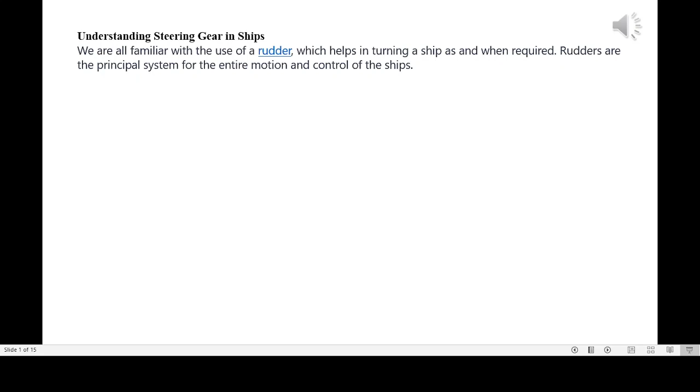Understanding steering gear in ships. We are all familiar with the use of a rudder, which helps in turning a ship as and when required. Rudders are the principal system for the entire motion and control of the ships.

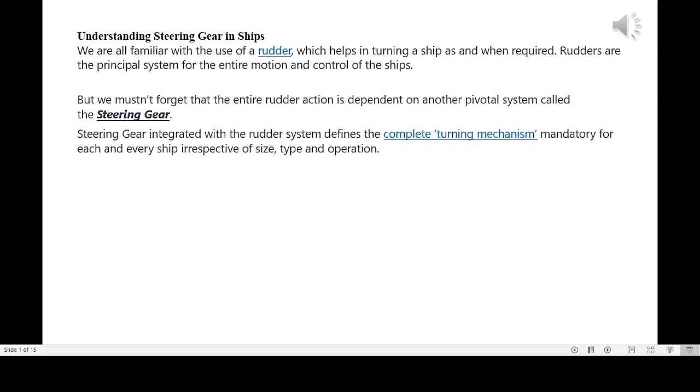But we mustn't forget that the entire rudder action is dependent on another pivotal system called the steering gear. Steering gear integrated with the rudder system defines the complete turning mechanism mandatory for each and every ship, irrespective of size, type, and operation. The steering gear system has been an indispensable part of the ship's machinery since the advent of the very early ships, which were operated by hand.

Here we have a simple hull, and I'm just going to attach a normal rudder to the stern. If we keep the rudder amidships, we can watch how the water flows around the hull-rudder combination. It flows evenly, and this means there's no turning force generated, so the hull should move in a straight line.

If we now turn the rudder to port, we can see the effect it has on the flow of water. This board-type rudder has now directed the water in a different direction, at an angle away from the boat. The extra water increases the pressure exerted on this side, and decreases the pressure on this side. This pressure difference pushes the stern in this direction, inducing the desired turn to port.

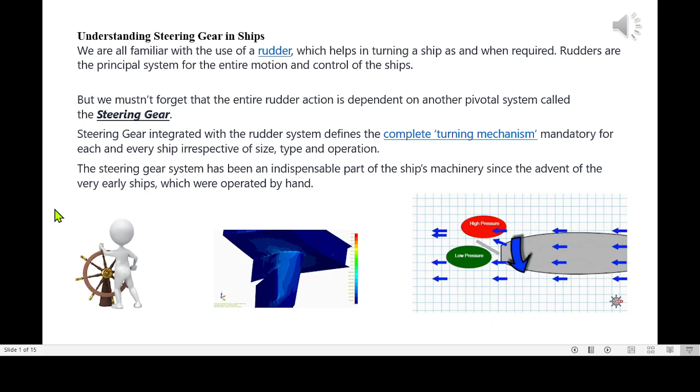Steering gear is equipment provided on ships to change the direction of the ship during sailing or maneuvering. The steering gear works only when the ship is in motion and does not work when the ship is stationary.

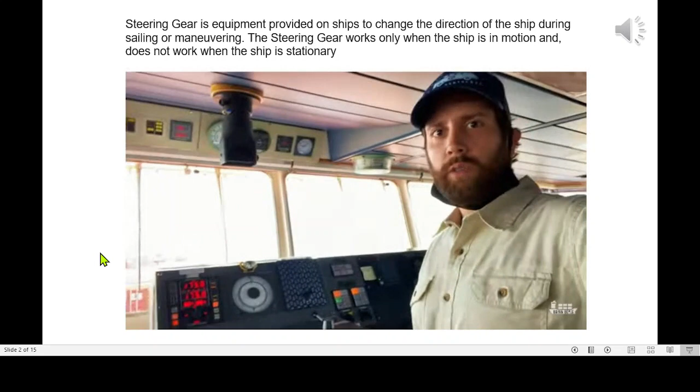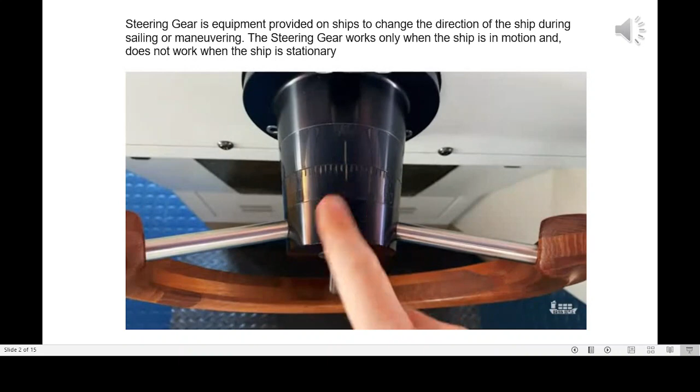We're up on the navigation bridge, and I'm standing in front of the helm here, which is where we steer the ship. So this is the helm here. It has this faint line here where you can give rudder commands. So right now this is midship. If we turn it over, that would be starboard 10. That would be port 10.

The reason it's beeping at us right now is because we're on autopilot, so it's beeping at you to tell you, hey, you need to switch over to hand steering. Otherwise, I'm not going to do anything.

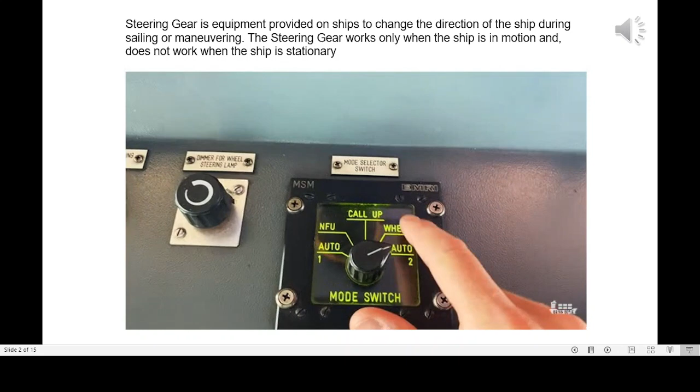So here's the different modes here. We've got autopilot 1, autopilot 2, which is what we're currently using, wheel or hand steering, call up, and NFU, which is non-follow-up. So here's autopilot 2. This is the heading that we have set for it to steer. This is what the actual heading is, the gyro heading. So we're steering right now 300.0.

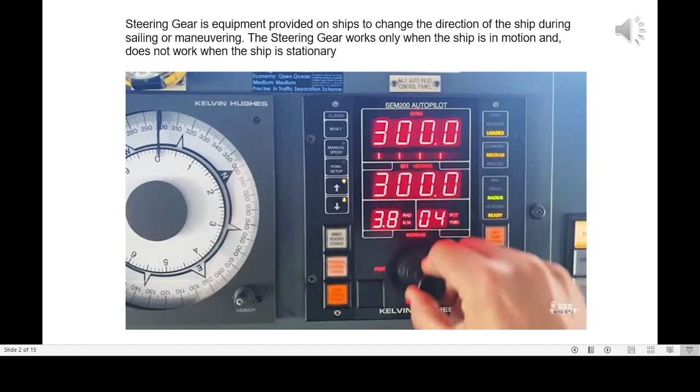A couple other modes we have. The radius - this correlates to the rate of turn. So if we have a smaller radius in the turning circle, you can see the rate of turn increases. If we're going fast enough, you don't want to have a high rate of turn, otherwise the ship will heel over and move a little bit too aggressively in the turn. So try to keep it around like 5 degrees is pretty good.

Here's autopilot 1, which we cover up just to make sure you're not trying to hit the wrong switch here. You see here it'll beep at you as well, unless we switch it over to autopilot 1. We have 2 autopilots just for redundancy in case one fails, and every day we switch the autopilot units just to keep the number of hours on them as even as possible.

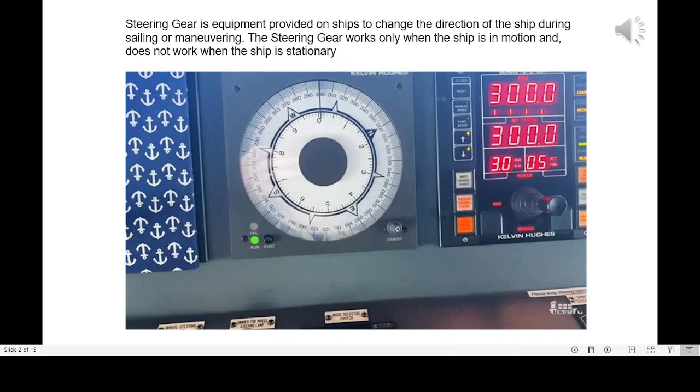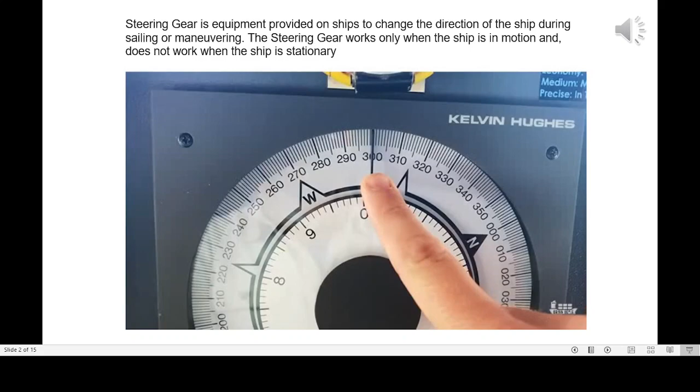This right here is a gyro compass. It's an analog version of this reading right here. So we're steering 300.0. This is the non-follow-up tiller.

When you move this, it'll move the rudder until you let go, and then it'll stay at whatever you left it at. I'll show you an example of how that works here in a moment.

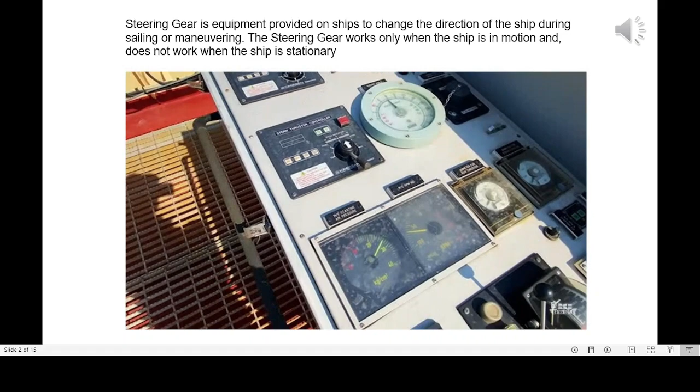So when we're in call up mode, it allows the ship to steer using this right here. We can also send the throttle over here in call up mode. We can send the stern thruster and the bow thruster out here as well. And this console looks identical on the starboard side.

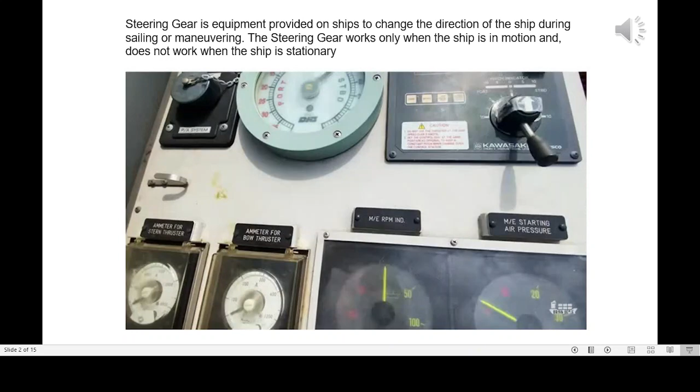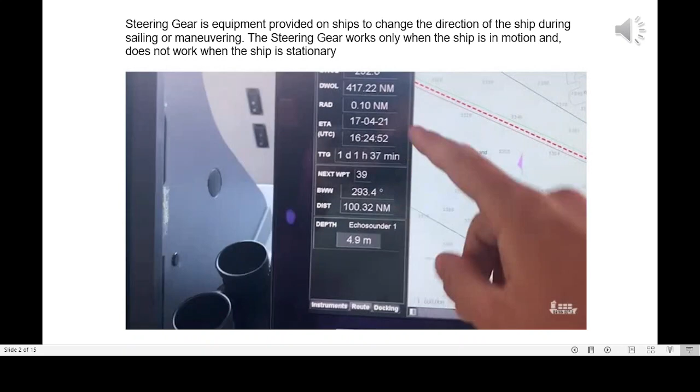Okay, so we're going to steer back to our next waypoint, which is 293. And we'll do that in hand steering to demonstrate how we do steering by hand and with non-follow-up. All right, so let's go to hand steering.

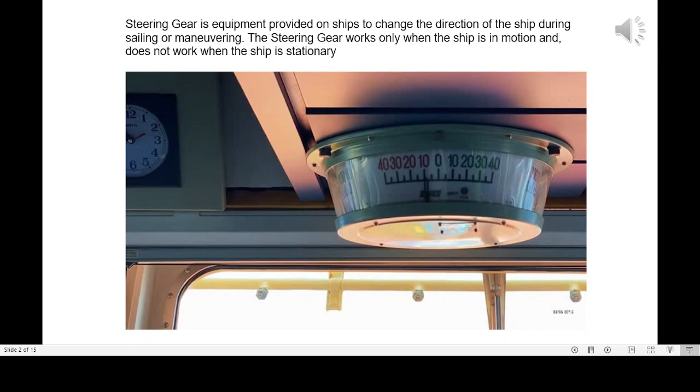He's on 300, so we'll go to 293. So he's turning the wheel to port 10 there. Our rudder angle indicator shows what he's doing there. We also get some other information that's useful, like rate of turn, so he's turning at a rate of about 8 degrees a minute to port.

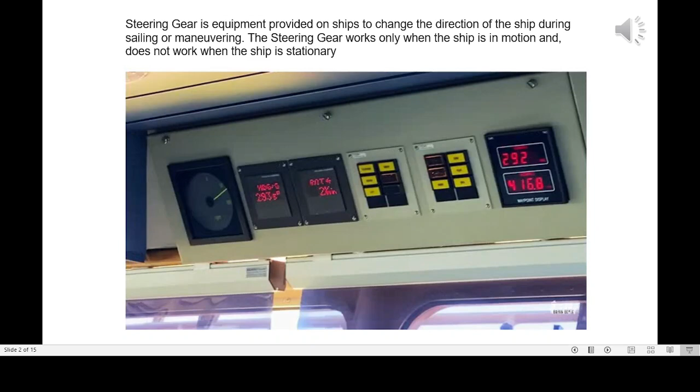When he gets closer to 293, he's going to have to apply counter rudder to slow the swing of the ship. So there's the counter rudder. The rate of turn is slowly decreasing to about 0 degrees there. So now he's steady on just about 293.

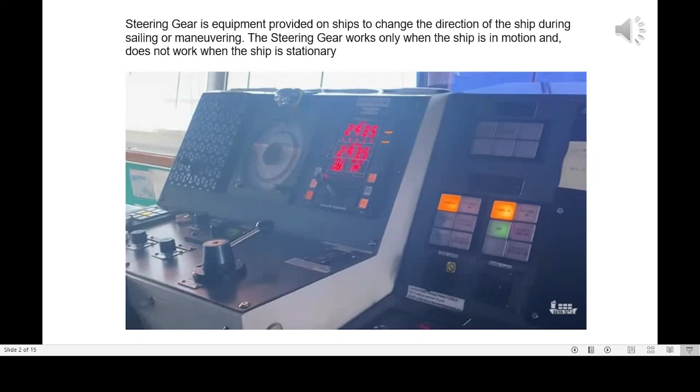All right, now we're going to show non-follow-up. So let's switch to NFU. NFU, rudders amidships, NFU. So he's going to move that tiller, left 10. He's got to hold that tiller and then release it once he gets it on the angle he wants. Let's go right 10.

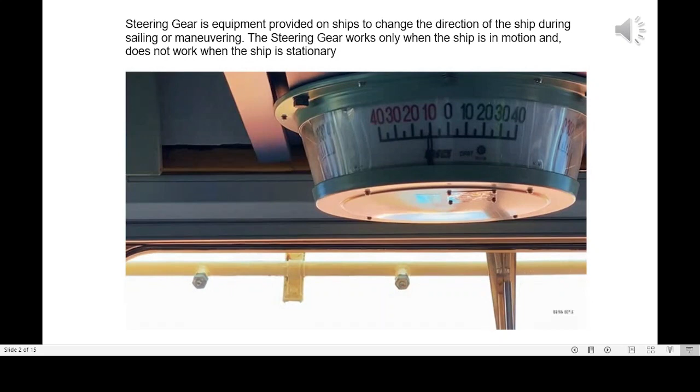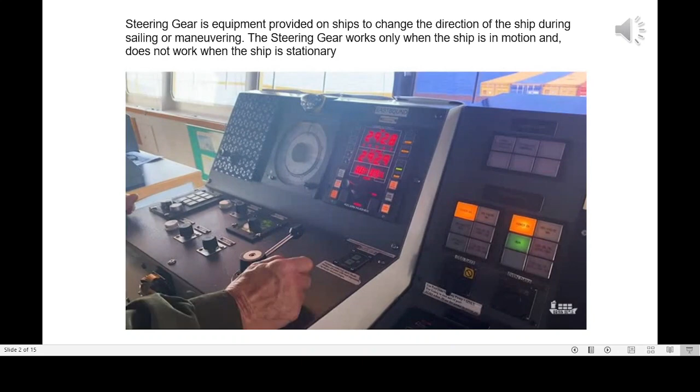There are 2 steering gears. We have number 1 steering gear and number 2 steering gear. These alternate every day. Even days we try to run the number 2 pump, and odd days we run the number 1 pump. So you can see today's the 16th, that's an even day, so we have the number 2 pump running.

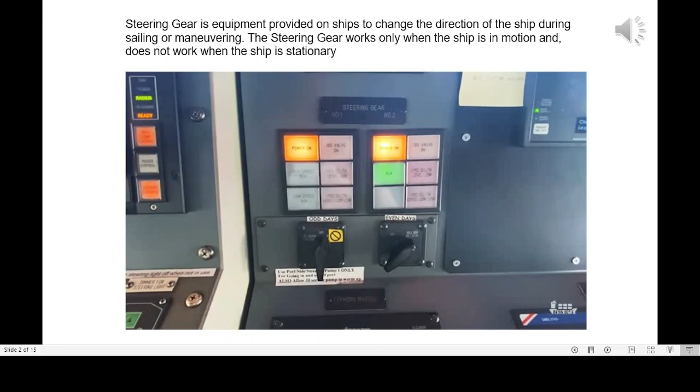Whenever we're coming in and out of port, we always have the number 1 pump on though, because that's attached to the emergency bus. So if we lost power, the emergency diesel generator would turn on and would still give us power to our steering. These steering pumps are hydraulic pumps that move a steering rack connected to the rudder. We'll go back to the steering gear and look at these 2 pumps and the steering gear system itself.

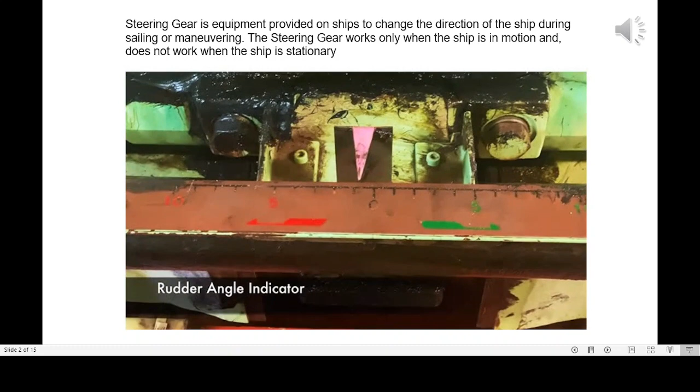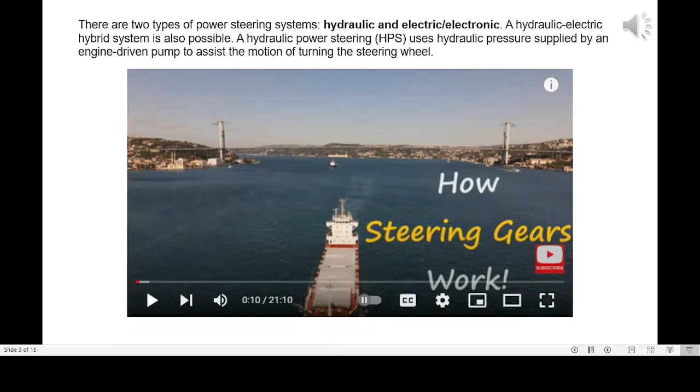In order to be able to achieve this, the item we're going to be focusing on in this video is called a steering gear. In order to understand how the steering gear works, we're going to need to briefly discuss the topic of hydraulics and take a look at some of the steering gear's main components.

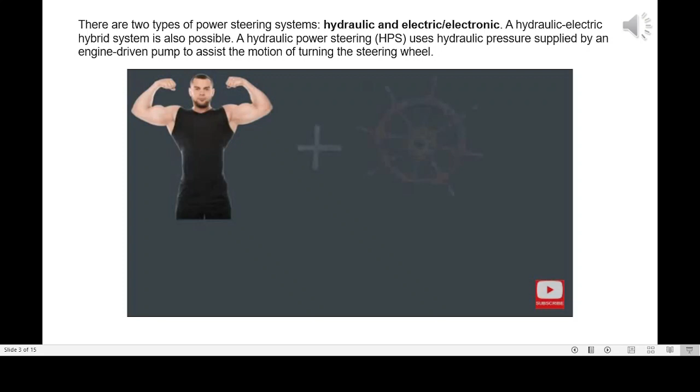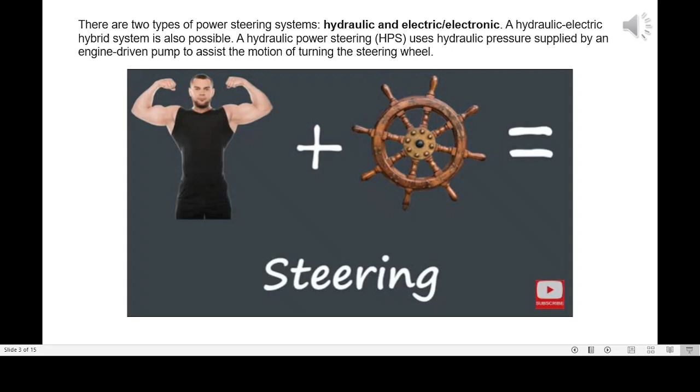Now in the past, when you wanted to steer a ship, you could do it mechanically. You would find a muscly sailor, stand him next to a big wheel, referred to as the helm, and he would turn the helm to port or starboard in order to change the direction of the vessel. The helm was connected via pulleys and levers to the rudder, and that's what actually caused the vessel to change direction. Fast forward several hundred years, and ships are now so large that it's not possible for a single person, or even many people, to manually adjust the position of the rudder using pulleys or levers, etc.

So how do we adjust the position of a rudder, accounting for the fact that the rudder may weigh several tons? Well, in engineering, there are 4 main ways used in order to actuate something. When we're talking about actuation, we're referring to movement.

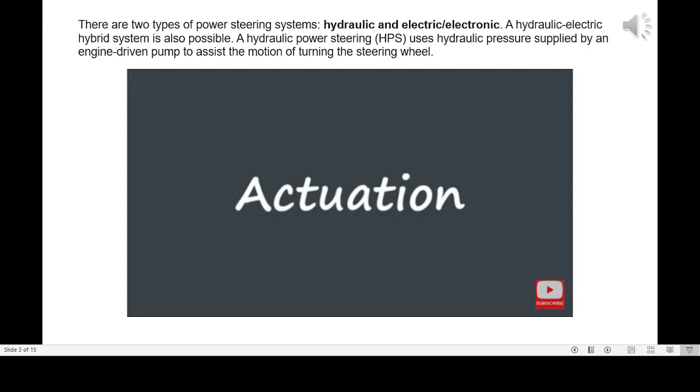If we want to actuate a valve, move it from the open to closed position, or any position in between, then we might do this mechanically, perhaps by using a hand lever or a hand wheel. We may do it pneumatically, using compressed air. We may do it hydraulically, often using some sort of oil, or electrically, using some sort of electromagnet or electric motor. Modern steering gears are predominantly electro-hydraulic.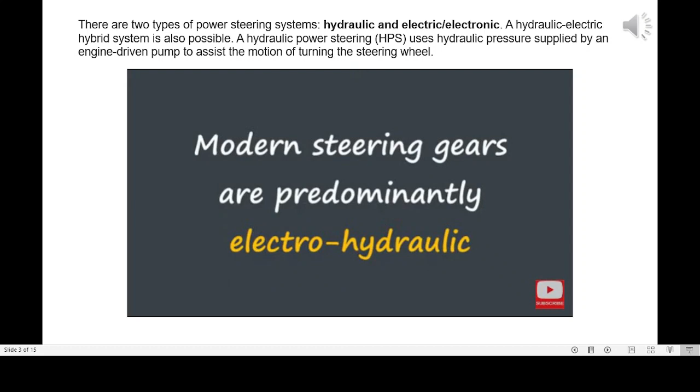They use an electric motor attached to a positive displacement pump, which pumps hydraulic fluid within a hydraulic system. So let's take a look at that in action.

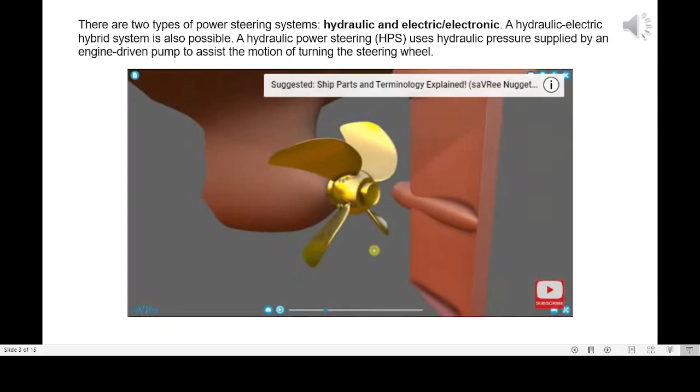Here we have our steering gear. Beneath the steering gear we have a rudder, and further forward we have a propeller. If I press the play button, we can see the propeller turning. If I zoom out a bit, we can actually see the rudder changing position. The rudder now is coming to port. The rudder now is coming to starboard.

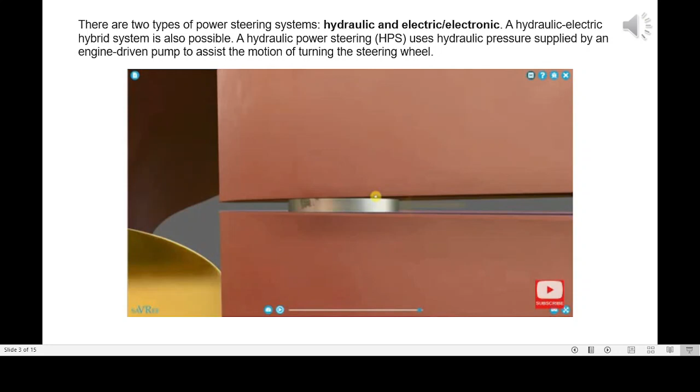The rudder is attached to the steering gear via a rudder stock. You can actually see it here. The rudder stock runs up through the rudder, through the hull of the vessel, and connects to our steering gear, which is this green item here.

Connecting to the rudder stock is a tiller. This type of tiller is a forked type tiller because it has a fork shape. Between the forked tiller is a pin and a codpiece. Don't ask me why it's called a codpiece, it just is. The pin connects onto a ram.

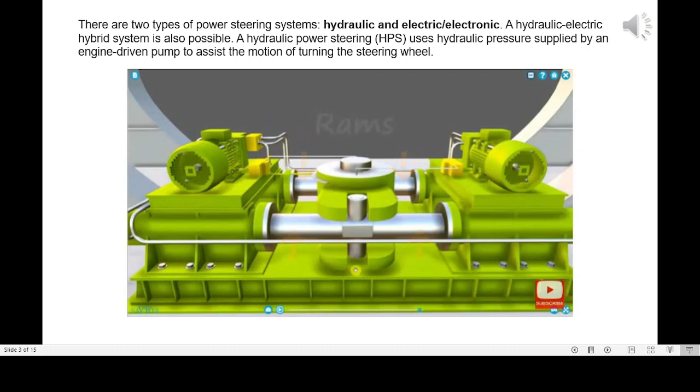You can see that there's a ram on the opposite side here, and it's these rams that are used to move the rudder. The rams move in a linear direction, either moving to port, which is towards the left side of the screen, or starboard, which is towards the right side of the screen. Although the rams move linearly, the rudder stock moves in a rotary direction, and it's the tiller that converts this linear motion from the rams to rotary motion at the rudder stock. You can also see the keyhole where the rudder stock attaches to the tiller.

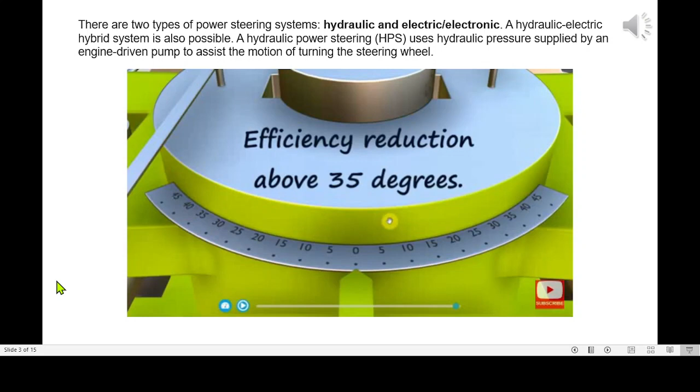Over on this side we can see a rudder angle indicator. The rudder angle indicator here goes from 0 to 45 degrees on both sides, but typically the rudder will only move between -35 to 35 degrees maximum. Once you get past 35 degrees, the rudder is no longer so effective, and it's definitely not as efficient because you get small eddy currents or eddies which create turbulence and reduce the efficiency of the rudder and the turning effect it creates. It's a requirement that the steering gear should have some form of local rudder angle indicator.

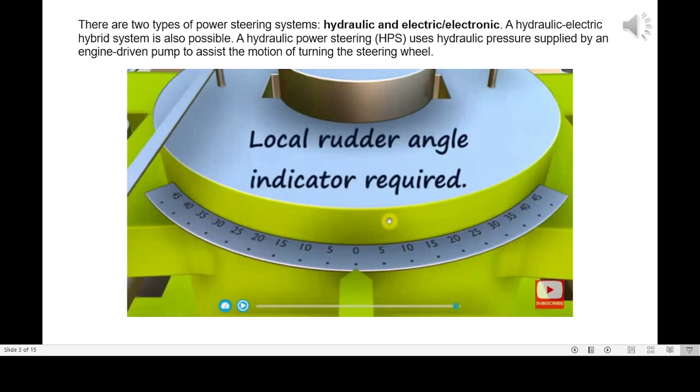So fixing this plate onto the tiller is a pretty good way to fulfill this requirement. Attached to the top you'll see we've actually got two bars, these two thin connections. These connect usually to a control box and some sort of position indicating transmitter. And we can transmit this signal back up to the bridge so that they can see the position that the rudder is currently in. So a local rudder angle indication is provided here, and a remote rudder angle indication is provided via a transmitter, which transmits a signal that is received in the wheelhouse, also known as the bridge.

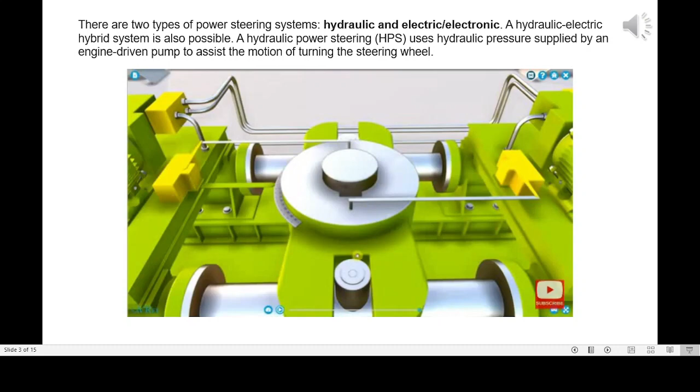Aside from that, on both sides of the steering gear we have an electric motor, one here and one on this side, and we have some directional control valves. Here is the one, and go around to this side, here is another.

Encasing the rams are cylinders. There are actually 4 cylinders on this type of steering gear. This is known as a 4-ram type steering gear. It's also possible to get 2-ram type steering gears. Those are the 2-ram type steering gear designs that you're likely to encounter, the 2-ram and 4-ram. And the other type of steering gear design that you may encounter is the rotary vane type steering gear, which we can cover in another video.

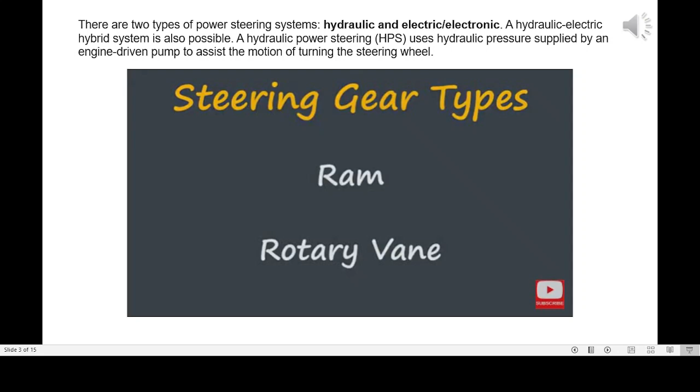So let's have a look at the steering gear in operation. You can see that the rams are sliding linearly from the left side of the screen to the right, or the right to the left, depending upon which rams you're looking at. So these rams here are moving off to port, and now they're moving off to starboard.

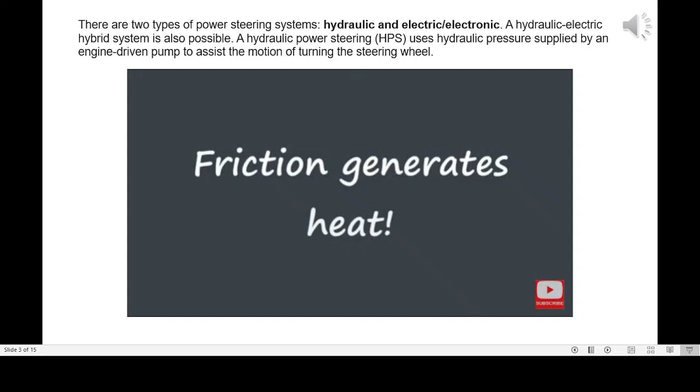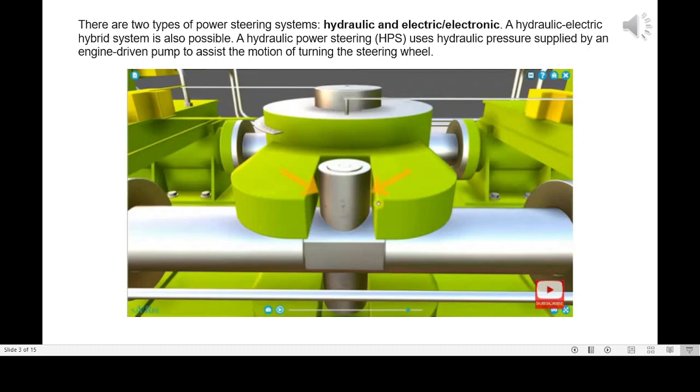Around this piece here, where we connect to the tiller, will usually be a lot of grease. We have a lot of grease because we don't want a lot of friction between these pieces, because friction generates heat. It's not so much that the pieces are moving very fast, because they're not. It's just that the sheer weight of each of these items and the effect of metal pressing against metal will cause some heat, some rubbing, some friction, some abrasion of these parts if we don't lubricate them. And that's the reason we usually add a lot of grease around this area and around this area here.

If we take a look again at the steering gear, this time from the top, we can really see how these rams work together in order to move the tiller and the rudder stock. You can actually see the linkages as well that connect to the control box and the transmitter, and how these move as the rams move back and forth.

So we know we've got a pump, we know we've got directional control valves, we've got rams, we've got cylinders, there'll be some valves on there as well, relief valves, a hydraulic oil storage tank, or in this case actually 2 tanks. But how are we moving the rams, and how are we correspondingly moving the rudder?

We take a look from this angle, you can see the steering gear moving off to port, or the rudder moving off to port, and now it begins to move off to starboard.

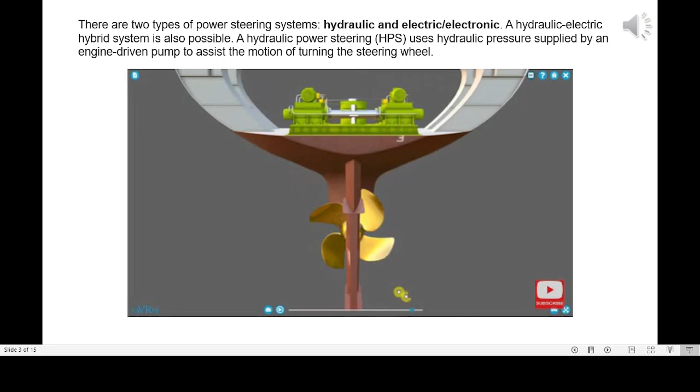We're moving the rudder using hydraulic fluid. Let's have a look now at a hydraulic system, and that will help us understand exactly how the rudder is being moved. So here we have a diagram of the hydraulic oil system used to control our steering gear.

Now this is a very simple diagram. A typical 4-ram steering gear system will have relief valves, isolation valves, check valves, also known as non-return valves, and generally the system is much more complicated. That being said, the principle concerning just how this steering gear works is very simple.

We use a hydraulic system to move the rudder because with the hydraulic system we can actually be quite flexible concerning just how we actuate the rudder. Let me just show you what I mean.

On the left side of the screen here we've got a motor, we've got a pump, and I won't go through all the parts, but we've got here a directional control valve and a tank. That's where we'll store our hydraulic fluid. Typically, hydraulic fluids are oil-based, but you can also use a glycol-water mixture if you have a very large hydraulic system.

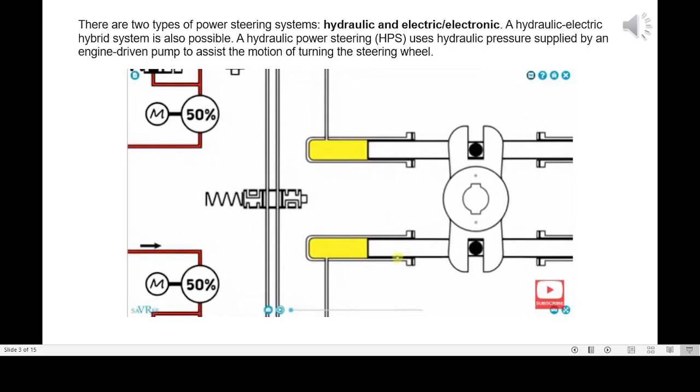Now we have another directional control valve here, which we're not actually going to actuate in this simulation. Then we've got our steering gear, which actually is this entire diagram. But you can see we've got 4 rams, 4 cylinders, the tiller, and the rudder stock.

Over on this side, the top left, we've got the same setup again. The reason we have the same setup is because in shipping, whenever you have something that's critical to the ship or to the vessel, you double up on it. In other words, you have what's called N+1, some people say N-1, which means you have 100% redundancy.

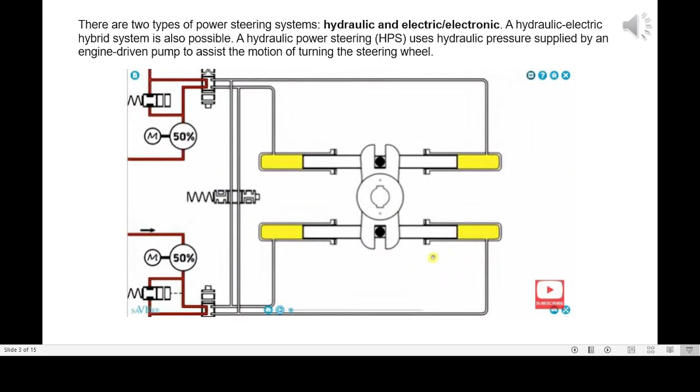So if we have an oil leak on any part of the system, let's just imagine for a moment that this particular pipe here, which contains hydraulic fluid, would burst. Then we can isolate this entire system here, that is to say the tank, the pump, the motor, up to the directional control valve, and then we can use the other pump, motor, and tank and directional control valve in order to actuate our rudder. So that's why you double up or install redundancy whenever you have a critical system.

And they do this also in power stations as well, and pretty much any other type of industrial plant where you have a critical system. A good example might be cooling pumps in a nuclear power station.

But let's stay focused on steering gears for a moment. In this example, what we want to do is distribute hydraulic oil to these cylinders, and this hydraulic oil is then going to force the rams to move in a certain direction. Let's have a look at exactly how that will occur.

I'll press the play button. Now keep your eye on these directional control valves. Notice now that the valves moved, and these red lines that have suddenly appeared represent hydraulic oil.

You can see that the oil is being delivered to the cylinders. As the oil is pumped into these cylinders, the rams are going to move away from where the oil is arriving into the cylinders, and they're going to force oil out at the opposite ends.

Let's just back that up again. So our hydraulic oil is pumped into the cylinders, top left and lower right. Usually these cylinders will be called A, B, C, D, or 1, 2, 3, 4, and the rams begin to move. As they move, hydraulic oil is discharged from the opposite ends.

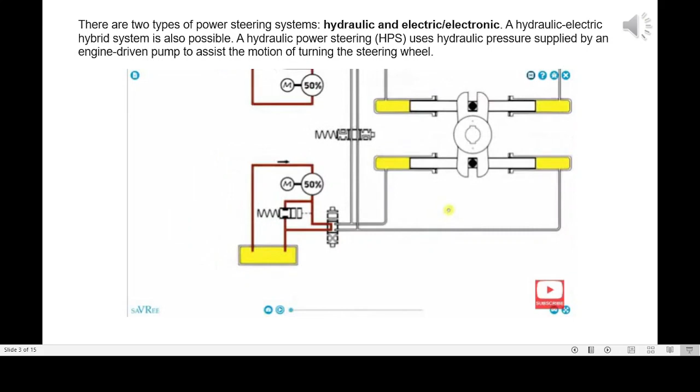What's important to realize here is that hydraulic oil actually occupies all of these lines, all of these channels, all of these pipes here, as well as the spaces within the cylinders, and we'll also have hydraulic oil in the tanks. So although in our diagram we're showing hydraulic oil being pumped around the system, the whole system is already charged with hydraulic oil.

If there's any air in the system it begins to act quite erratically, and for that reason we bleed off air within the system. Bleeding just means venting off the air. There will be air cocks or air purges, which are normally just some type of ball valve for this reason.

When the system is in the condition shown here, we're actually just recirculating the fluid from the suction side of the pump to the discharge side. You can see that the fluid would come up here, go to the right, go to the pump, that's the suction side, and then it would be discharged here, pass through the directional control valve, and go back to the tank. Now there are different designs concerning how the fluid is delivered back to the pump, whether directly or via a tank, but the operating principle is simply that we are recirculating hydraulic oil.

So we're not discharging any hydraulic oil to our cylinders, which means the rams are not being actuated, they're not moving. So if we go back to our animation, I'll press the play button again. We're recirculating the hydraulic oil at the moment.

The directional control valves have changed position again. We're discharging hydraulic oil, this time to the upper right cylinder and to the lower left. You can see the arrows there. And that means that as the rams move, they're going to discharge oil from the upper left and the lower right cylinders. You can see that occurring here.

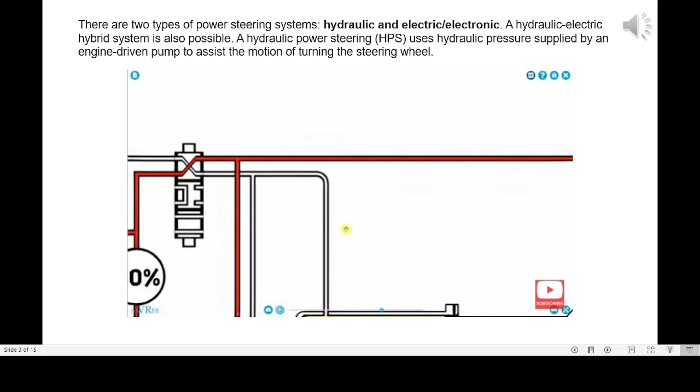And if we change the position of our directional control valves again, as you can see over here, then we are changing the flow paths within the system, which means the opposite effect is occurring compared to what we just saw. Hydraulic oil is entering the cylinder in the top right and the lower left, and is being discharged from the cylinders in the top left and lower right.

This diagram is very, very basic. We are not showing the servo pump. We're not showing the relief valves. We're not showing the check valves. But in order to understand exactly how our steering gear works, you don't need all of that stuff at this time. What we're trying to understand is simply that we can use hydraulic fluid to change the position of the rudder.

By using a directional control valve, like this one here, we can change the flow path of the hydraulic oil within the system, which in turn allows us to change the direction in which we move the rudder, whether it be from port to starboard or starboard to port.

Let's just have a look at that again briefly, because it's a very important part of just how a steering gear works. So here you can see we're recirculating our hydraulic oil. Here you can see that we're crossing over our systems because we want to send hydraulic oil along these paths, and that's where we're discharging hydraulic oil.

You can see our hydraulic oil is coming back to the pump. That's represented by the green line, and we can see our hydraulic oil is being discharged from the pump. That's represented by these red lines.

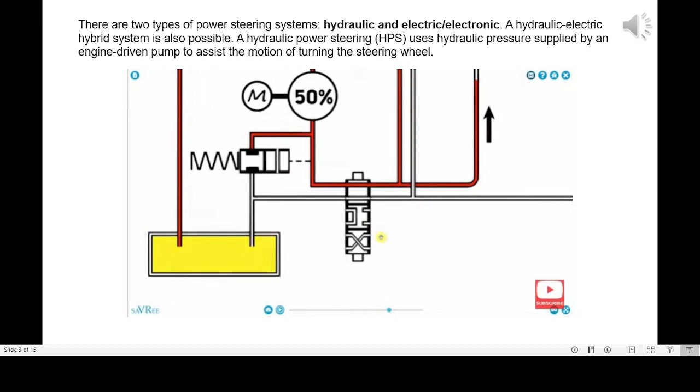Let's back it up. Here you go, the green lines, fluid returning, going to the tank. Change the position, those green lines become red. So these directional control valves are very, very important because those are what allow us to reverse the direction that we're moving the rudder in.

What's also interesting is that we have these two separate systems, two pumps, two motors, two directional control valves, there would also be two relief valves, etc. And if we were to isolate these two systems, we can do that using this valve here, then we can have two separate systems operating completely independently of one another. That again is a safety feature associated with the steering gear.

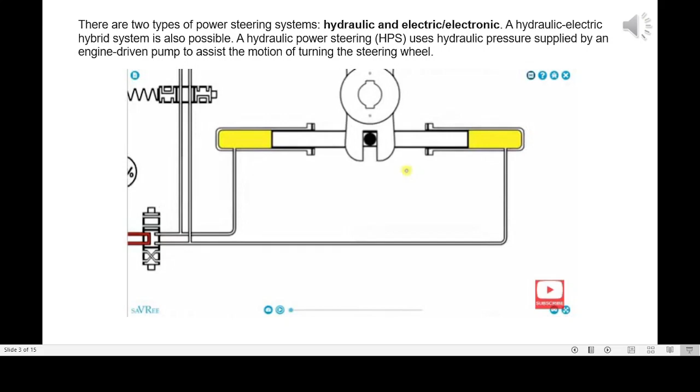So if we look at the top system, imagine we have an oil leak, imagine the pump fails, imagine the motor fails, imagine that the hydraulic oil tank has a leak. If any of that occurs, then we can completely isolate the top system and use the bottom system instead. Depending upon where the failures occurred, we could potentially use one pump here to operate all of the rams, or we completely isolate the top two rams and the top two cylinders, and actuate the rudder using only the bottom two rams and the bottom two cylinders. So completely independent systems, full redundancy, and that's what makes the system so safe.

Let's now go back to our original 3D model of the steering gear so that we can have a look at how this whole system works in the real world and how you're actually going to see it if you're on board a ship.

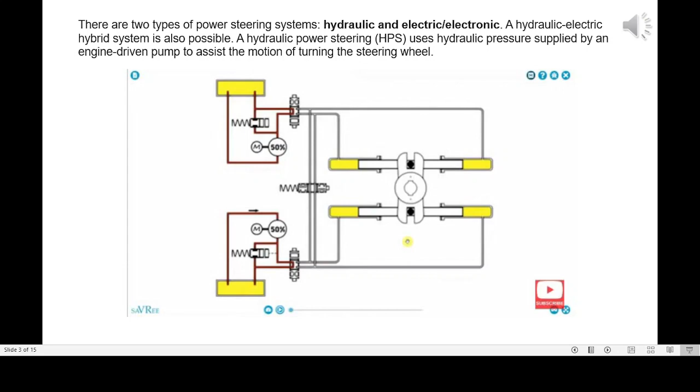Steering gear system in ship. The efficiency of the performance of steering gear depends on some main aspects.

These basic requirements to be invariably met by all steering gears are guided by rules set by classification societies. They can be briefly outlined as per standard requirements: the steering gear should be capable of steering the ship from 35 degrees port to 35 degrees starboard and vice versa, with the vessel plying forwards at a steady head-on speed for maximum continuous rated shaft RPM, and summer load waterline, within a time frame of a maximum of 28 seconds.

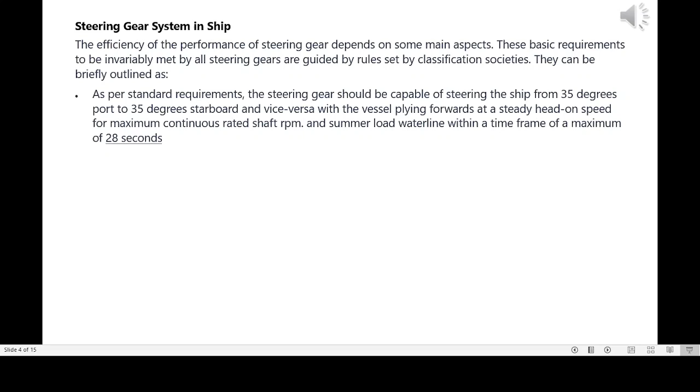With one of the power units inoperative, the rudder shall be capable of turning 15 degrees port to 15 degrees starboard and vice versa within a time frame of 1 minute, with the vessel moving at half its rated maximum speed or 7 knots, whichever is greater, at summer load line.

The major power units and the control systems are to be duplicated so that if one of them fails, the other can easily substitute for it as standby.

Emergency power supply: the steering gear system is to be provided with an additional power unit, hydraulic pump, etc., connected to the emergency power supply from the emergency generator, which shall be capable of turning the rudder from 15 degrees from one side to another side within 60 seconds, with the vessel moving at a maximum service speed or 7 knots, whichever is greater.

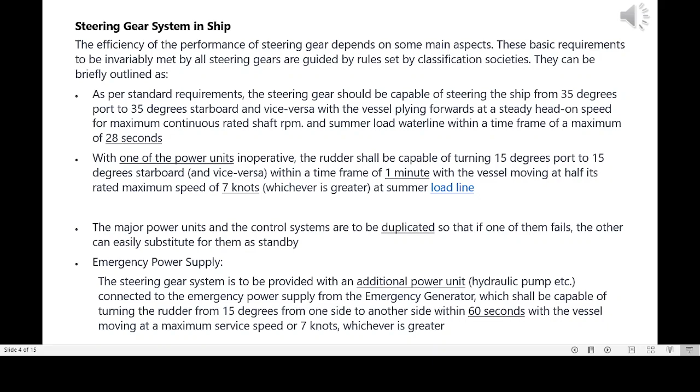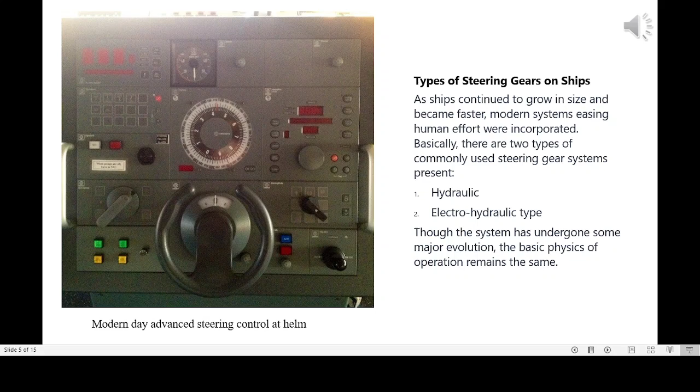Types of steering gears on ships. As ships continued to grow in size and became faster, modern systems easing human effort were incorporated. Basically, there are two types of commonly used steering gear systems: hydraulic and electro-hydraulic type. Though the system has undergone some major evolution, the basic physics of operation remains the same.

The main control of the steering operations is given from the helm of any ship, similar to an automobile where the entire control of the vehicle's steerability rests on the steering wheel of the driver. The control force for turning is triggered off from the wheel at the helm, which reaches the steering gear system. The steering gear system generates a torsional force at a certain scale, which is then transmitted to the rudder stock that turns the rudder.

The intermediate steering systems of a modern-day ship can be multifarious, with each small component having its own unique function. We omit to discuss each and every such component in detail, and instead give a better illustration of the exact work sequence in a simple rudder system.

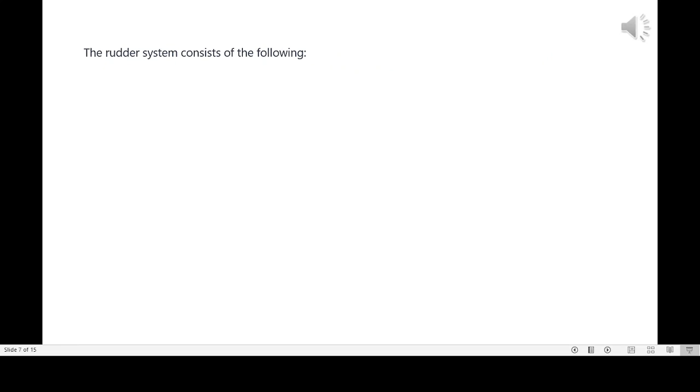The rudder system consists of the following: rudder actuators, power units, and other auxiliary equipment needed to turn the rudder by applying torque, hydraulic pumps and valves.

In hydraulic and electro-hydraulic systems, hydraulic pressure is developed by hydraulic pumps, which are mainly driven by electric motors in electro-hydraulic systems, or sometimes through purely mechanical means in hydraulic systems. However, mainly advanced electro-hydraulic systems are predominant in ships nowadays.

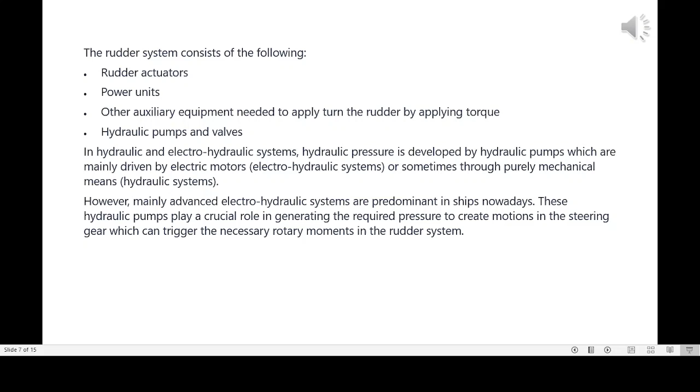These hydraulic pumps play a crucial role in generating the required pressure to create motions in the steering gear, which can trigger the necessary rotary moments in the rudder system. These pumps are basically of two major types: radial piston type with Hele-Shaw, and axial piston type with swash plate.

Actuators mediate the coordination between the generated hydraulic pressure from pumps, driven electrically of course, and the rudder stock, by converting it into a mechanical force, creating a turning moment for the rudder. Actuators are now mainly electrically driven by power units.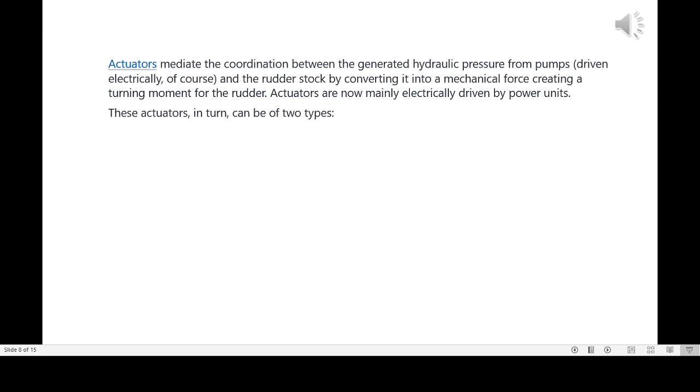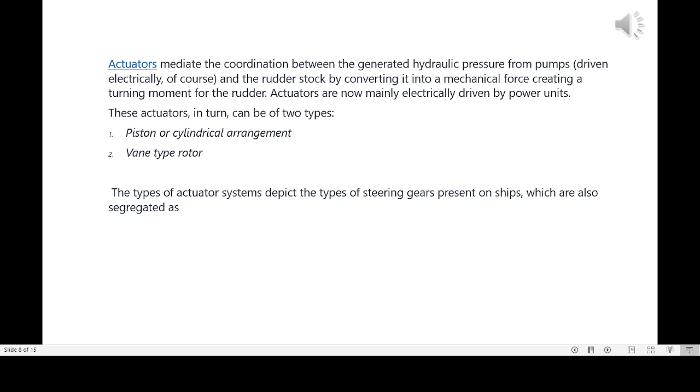These actuators, in turn, can be of two types: piston or cylindrical arrangement, and vane-type rotor. The types of actuator systems depict the types of steering gears present on ships, which are also segregated as ram-type and rotary vane-type arrangements accordingly.

Ram-type steering gear system. Ram-type steering gear is one of the commonly used steering gear constructions and is quite expensive to construct. The basic principle is same as that of a hydraulically driven motor engine or lift. There are 4 hydraulic cylinders attached to the 2 arms of the actuator disc, on both sides. These cylinders are directly coupled to electrically driven hydraulic pumps, which generate hydraulic pressure through pipes.

The ram-type steering gear arrangement produces a considerably high value of torque for a given applied power. The hydraulic oil pressure varies from 100 bars to 175 bars depending on the size of the rudder and torque required.

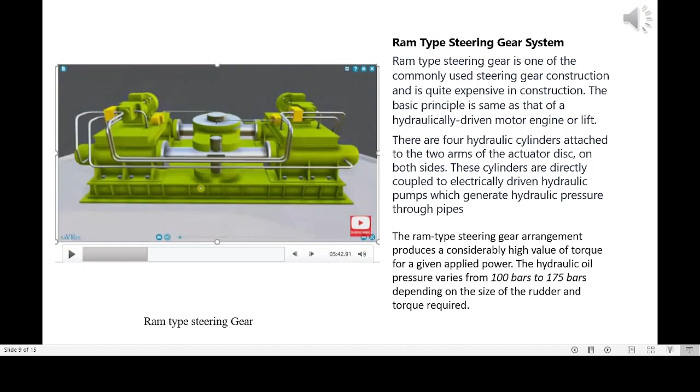Rotary vane steering gear. In rotary vane steering gear, there is a fixed housing in which 2 vanes rotate. The housing along with the vanes form 4 chambers. The physics behind its operation is similar to the ram type, with a small difference.

A rotary vane type arrangement is used when the pressure requirement is 60 to 100 bar for producing the required torque. This is the main advantage of rotary vane type steering gear, requiring lesser hydraulic pressure and thus power for producing the same amount of torque as ram type.

Procedure of testing steering gears.

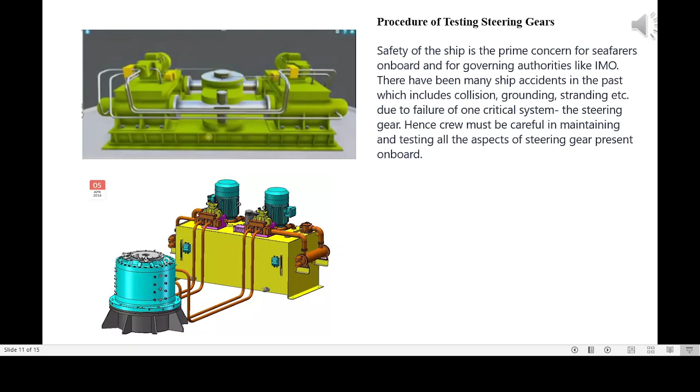Safety of the ship is the prime concern for seafarers on board and for governing authorities like IMO. There have been many ship accidents in the past, including collision, grounding, and stranding, due to failure of one critical system, the steering gear. Hence, crew must be careful in maintaining and testing all aspects of the steering gear present on board.

Specifications and guidelines are laid down by the authorities and in the Safety Management System (SMS) of the ship to continuously monitor the operation and safety system of the steering gear to avoid accidents due to its failure. The guidelines for tests and drills are provided in Chapter V, Regulation 26 of SOLAS 74. The following tests and drills are to be carried out within the given period of time as stated in Chapter V.

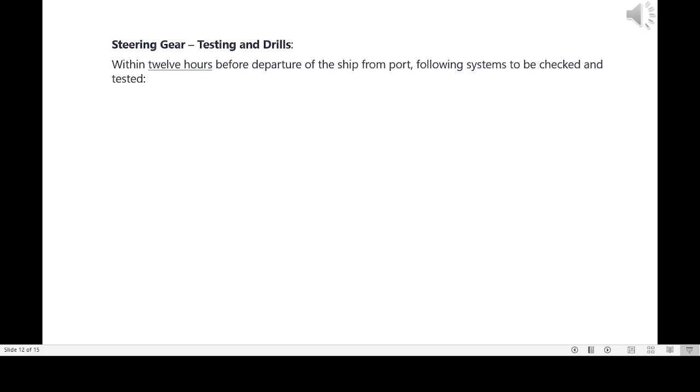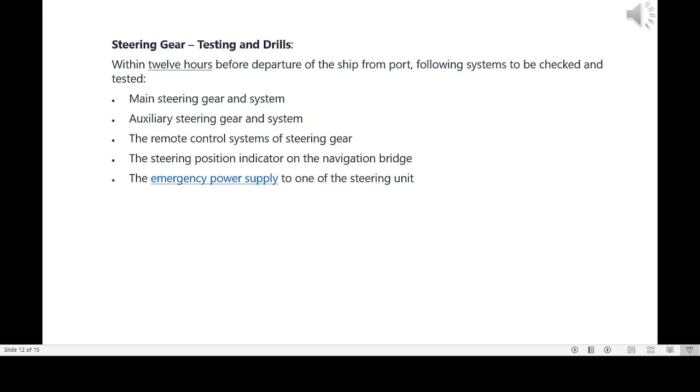Steering gear testing and drills: within 12 hours before departure of the ship from port, the following systems are to be checked and tested: main steering gear and system, auxiliary steering gear and system, the remote control systems of steering gear, the steering position indicator on the navigation bridge, the emergency power supply to one of the steering units, the rudder angle indicators showing actual position of the rudder, power failure alarms for the remote steering gear control system, power unit failure alarms for the steering gear unit, and automatic isolating arrangements and other automatic systems.

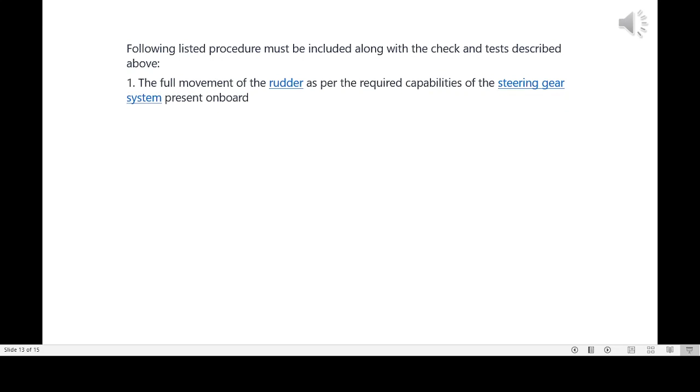The following listed procedure must be included along with the checks and tests described above: 1. The full movement of the rudder as per the required capabilities of the steering gear system present on board. 2. A visual inspection of all the linkages and connections in the steering gear. 3. The means of communication between the steering gear room and navigational bridge must always be operational.

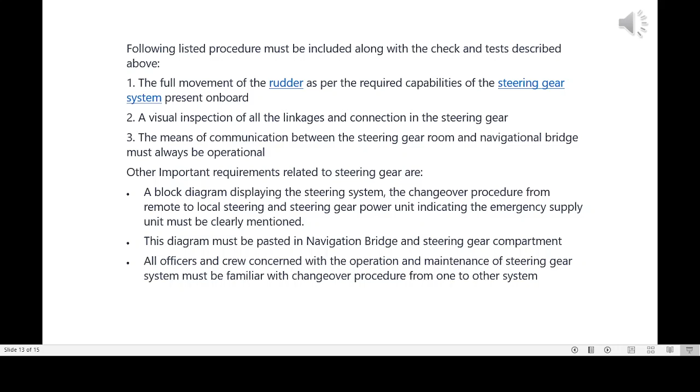Other important requirements related to steering gear are: a block diagram displaying the steering system, the changeover procedure from remote to local steering, and the steering gear power unit indicating the emergency supply unit must be clearly mentioned. This diagram must be pasted in the navigation bridge and steering gear compartment. All officers and crew concerned with the operation and maintenance of the steering gear system must be familiar with the changeover procedure from one system to the other.

Procedure for starting the emergency steering system. An emergency steering system, as the name suggests, is a system which is used during the failure of the main steering system of the ship.

What is emergency steering? A ship consists of an electromechanical steering gear unit which steers the vessel from one port to other. Normally the steering gear unit is a 2 or 4 ram electro-hydraulically operated unit with 2 or more hydraulic motors for the ram movement. A situation can occur in which the remote control operation may fail to work, causing a sudden loss of steering control from the bridge.

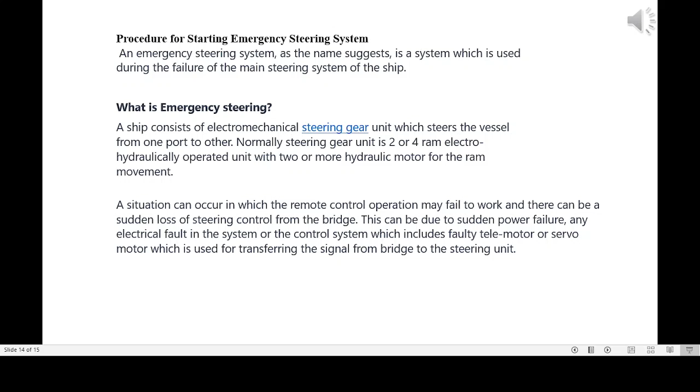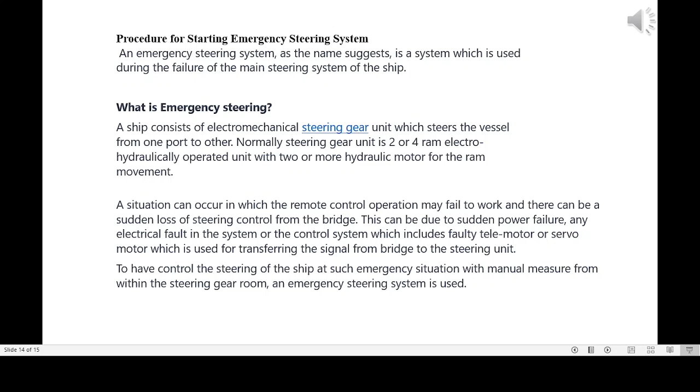This can be due to sudden power failure, any electrical fault in the system, or a fault in the control system which includes a faulty telemotor or servo motor used for transferring the signal from bridge to the steering unit. To regain control of the steering of the ship in such an emergency, with manual measures from within the steering gear room, an emergency steering system is used.

Procedure for emergency steering operation. The following points should be followed for emergency steering operation. The procedure and diagram for operating emergency steering should be displayed in the steering gear room and bridge.

Even in an emergency situation we cannot turn the massive rudder by hand or any other means, and that's why a hydraulic motor is given supply from the emergency generator directly through the emergency switchboard, as per SOLAS regulation. This should also be displayed in the steering room.

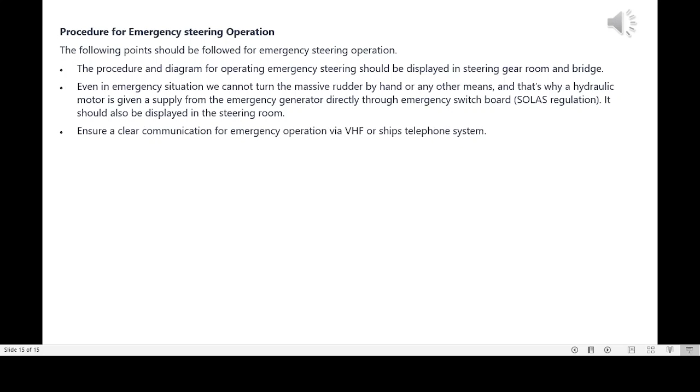Ensure clear communication for emergency operation via VHF or the ship's telephone system. Normally a switch is given in the power supply panel of the steering gear for the telemotor. Switch off the supply from the panel, then change the mode of operation by selecting the switch for the motor which is supplied emergency power.

There is a safety pin at the manual operation helm wheel so that during normal operation the manual operation always remains in cut-off mode. Remove that pin. A helm wheel is provided which controls the flow of oil to the rams, along with a rudder angle indicator. The wheel can be turned clockwise or anti-clockwise to go port or starboard, or vice versa.

If there is a power failure, receive orders from the bridge for the rudder angle through the sound powered telephone. As soon as you get the orders, turn the wheel and check the rudder angle indicator. A routine check should always be done for proper working of the manual emergency system and steering gear system.